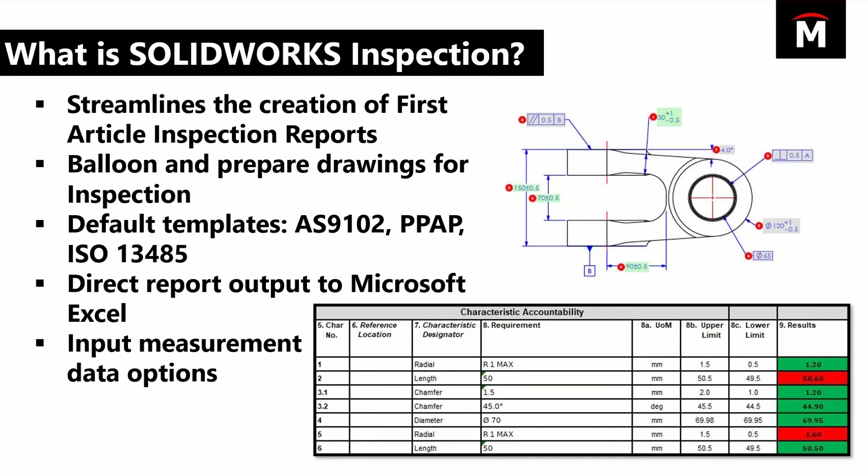Last but not least, we'll look at some input measurements for the data you get from, say, a CMM machine, like a Faro ARM or the PC DMIS tools. Take a look at that.

So you're thinking, okay, well that's great, I know what it is now, but why use it? Why is that important to me? Well right now, 85% of all first article inspection reports are performed manually. And you're like, wow, that's actually a lot - that is a pretty astounding number.

But if you think about it, all the human errors that could be involved, and the inconsistencies really is key here, because if you have 3 quality engineers producing some kind of first article inspection report, depending on which one you get it from, you're like, I don't know what I'm supposed to do with this. The technician will look at it and be like, what? So you want to have that consistency across the board, which will in turn improve the quality, and you won't have to worry about each quality engineer wasting their time creating their own individual reports when they could just be using a standard template across the board.

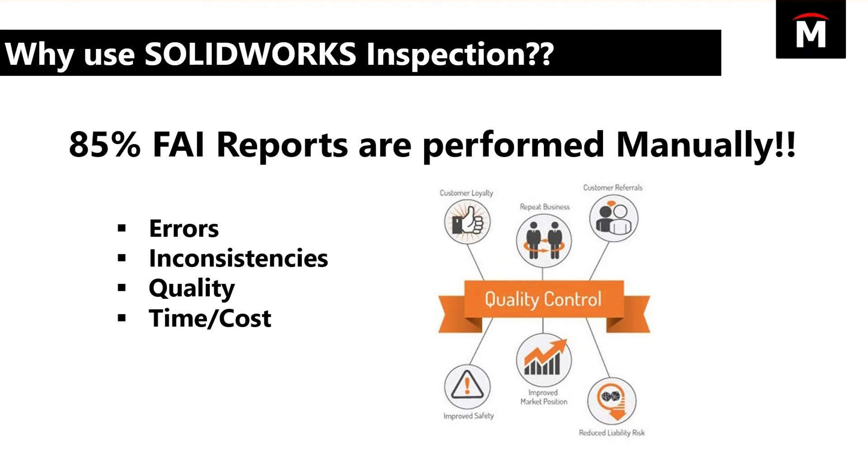And of course, in the end, that'll save you a lot of costs.

So SOLIDWORKS has 2 versions of inspection. It has the add-in, which works inside of SOLIDWORKS, so it's native - you open up native SOLIDWORKS drawing files or part files. And then you also have the standalone version. The standalone doesn't need to have SOLIDWORKS installed - it's just its own little button at the bottom of your screen, just another application on your machine.

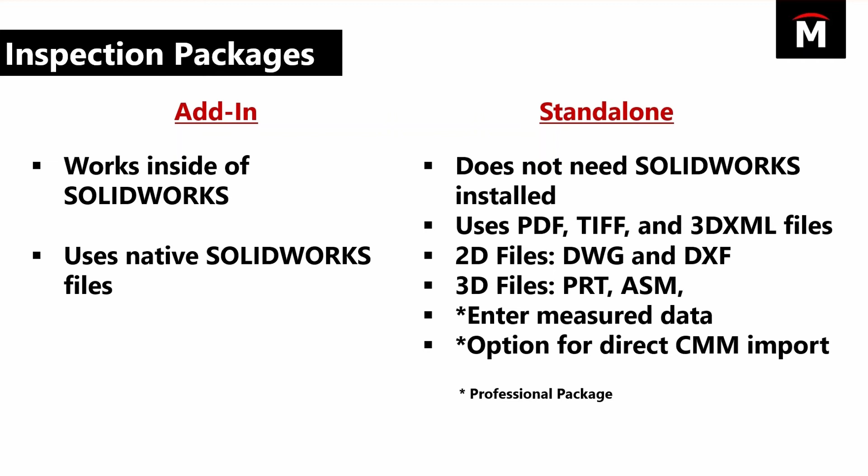And from that, you actually use PDFs, TIFFs, whatever kind of documents you can produce from other CAD programs, and it doesn't have to be SOLIDWORKS programs. As long as you can open it up and read the dimensions, you can use it inside the standalone version. And of course, when you jump up to the professional package, you can enter in your measured data, as well as directly import some of that CMM data. We'll take a look at that a little later on in the broadcast.

So we're going to break this down into 3 sections. First, we're going to start with our add-in, and the add-in, start with our project creation. We're going to add some balloons and then output some of that documentation. Let's take a look at it real quick.

All right, so everybody should see my SOLIDWORKS screen. I've just got a drawing up of this little knuckle on the screen itself, and I've already got my SOLIDWORKS inspection add-in added in. It's just like any one of those other add-ins, your markup, your evaluate, your annotations. So what we're going to do is we're going to start a new project with this.

I'm going to start a new project from scratch, so I can show you the ins and outs of where it begins and where it ends.

Now we want to go over here and pick out one of our templates. The point of having all these templates is because of all the standards out there, the ANSI and ISO standards. In the end, this is where you can build consistency across the board, so you don't have everybody making their own first article inspection reports randomly from one person to the next.

So now we have the creation of this inspection project. We just need to go through some general settings, import some of those, and then we can go on to the next step. The first thing you can do is easily go here and start typing in the name.

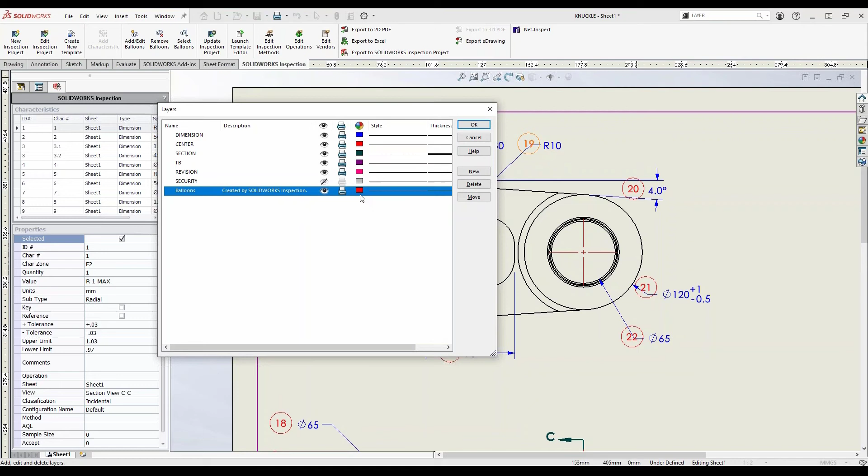As a matter of fact, you can go up here to the layer properties, and you can actually change the color of the balloons themselves, which is pretty nice if you wanted to change them. In this case, we're going to leave them the same, but it's just as easy as that if you wanted to make customizations to this.

The other thing here is when we click on this 70 plus or minus 0.5, it automatically recognizes that over here in our properties for our tolerances. So if it has a tolerance built into the dimension, it'll recognize it. But take for instance this 90 dimension down here, it just uses the tolerances set up in the project template. So it's very smart—it recognizes everything you see on the screen, and you're good to go.

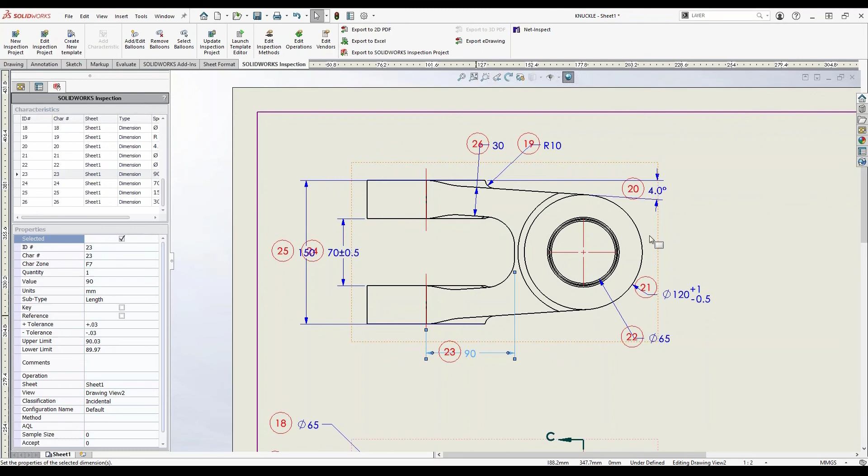All right, so I'll fit this to screen so we can see everything. Now what we need to do is create a report, right? Because everything's balloon, it's ready to go.

So check this out, we have different options available to us. We can export this to a 2D PDF, we can even export it to an e-drawing that became available in the last couple of years, but this guy right here, export to Excel, this is the one we want to see because this one's really powerful.

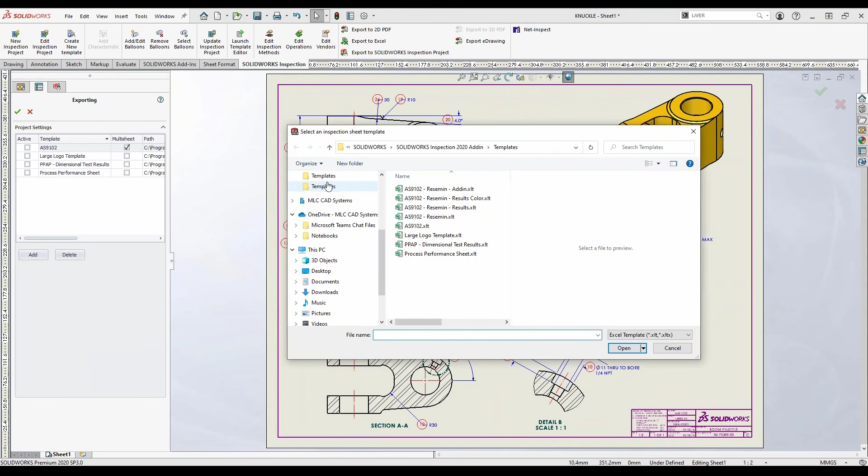I'm going to go in here and add the correct template. There we go. So I've built this template here so we can see some of the customizations you can do inside of Excel itself. Let's go ahead and hit the green check here, and I'm going to override this guy.

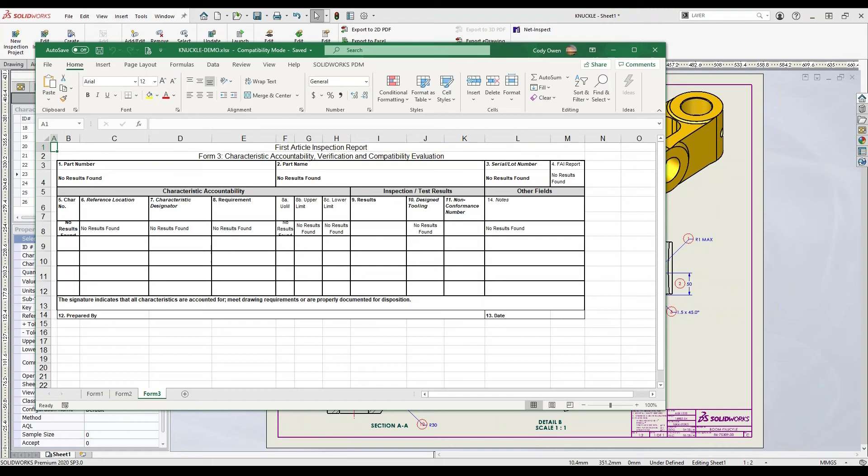There we go. So we're sitting back relaxed, let SOLIDWORKS do all the work for us, and now we can go down here and take a look at our inspection report. As you can see, when we go through, it'll fill out the form for us. It'll put in, if we had a bill of materials, which I'll show you in a minute, it'll show us the bill of materials down here on the screen.

As a matter of fact, I'll show you a little bit more about how you can color code some of these things a little later inside the standalone version itself.

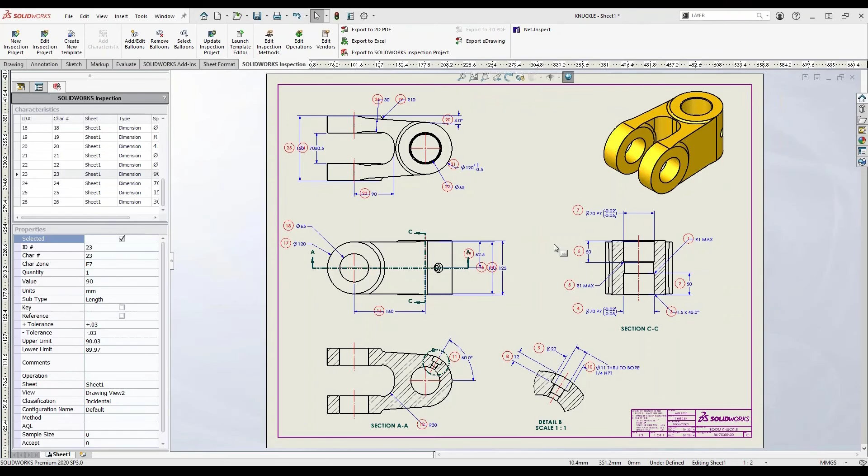So you've got your document made up and you're ready to go, right? And that's pretty much all there is to having the add-in inside of SOLIDWORKS. It recognizes all of those dimensions automatically, and it's a very familiar environment. If the mechanical engineers are having to do this work, they're going to be able to pick it up and learn it very quickly and produce some very consistent reports.

All right, so talked a little bit about the add-in. The next thing we want to look at is the standalone version. The standalone version itself, you go through the same motions where you create a project. This time, since we're going to be working with a PDF, we have to use our optical character recognition to define some of those characters for our file properties, and then also use our Smart Extract tool to pick up some of those dimensions, notes, and so forth.

Let's take a look at that. So I've got my SOLIDWORKS Inspection standalone already open for me. Now I'm going to go ahead and start a new project.

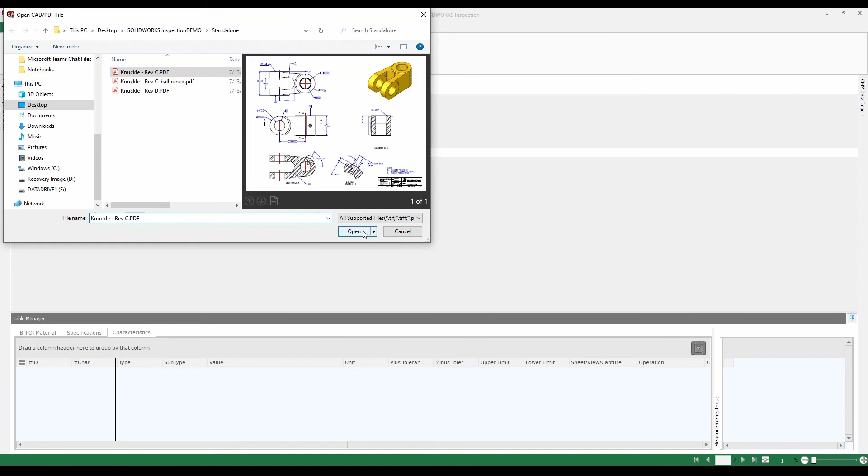When I start a new project, I'm just going to use this template here. Once again, these templates are just standard templates, and you can easily go through and customize these things as you want. So I'm going to use my RevC. In a little bit, I'm going to show you how we can go through and create a revision update with our RevD, and how easy that is to do.

All right, so what we have here is pretty much that same drawing, it's just got a couple more items on it. I'm going to go ahead and look at our properties. Fit this to screen so you can see it all. All right, so we can see our whole drawing here.

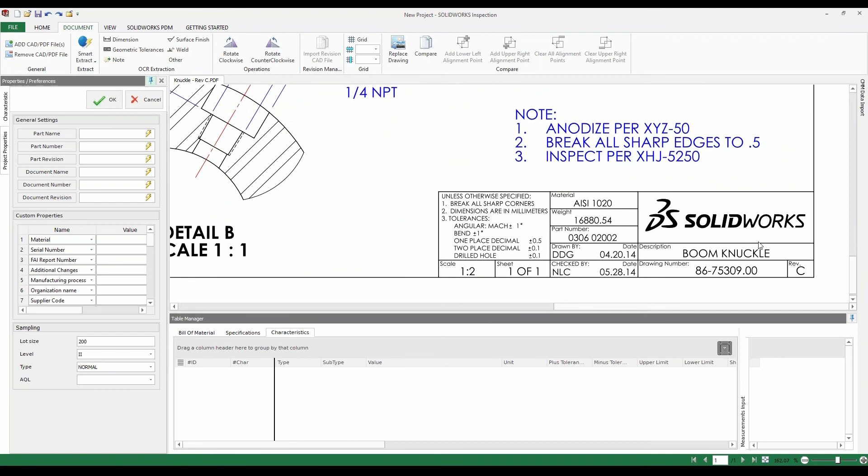Now what we want to do is go in here and either type the part name in, the part number, revision, kind of do all that little tedious work that has to be done. But see those little lightning bolts next to it? Well, that's that optical character recognition. And we can actually pick up those characters by clicking on the little lightning bolt, going over here and drawing a box around the name itself, and it inputs it over here. So that's pretty awesome, right?

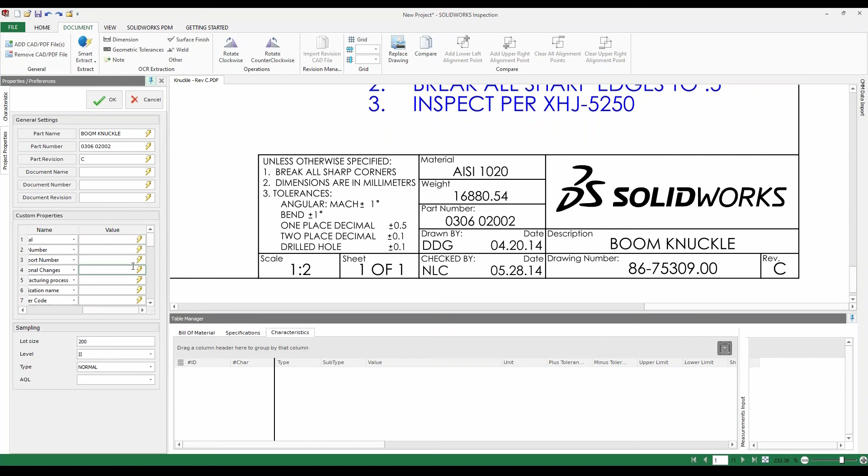If we want to, we can go ahead and add a couple more in there so we can pick up everything. So it doesn't have those file properties built into it like the SOLIDWORKS drawing did, but it's very easy just to draw a box around some text and make sure it looks good, and that's good to go. So you can do that with the general settings themselves and also your custom properties. You can do the same thing for the materials, for the manufacturing process, and so on.

All right, I'll click OK there. I'll fit this back to screen, and we're going to focus in on the upper portion of this document. Okay, so now we've shown you how we can pull those file properties in. Now let's take a look at some of these dimensions.

I'm going to go up here to my Smart Extract, and I'll just draw a box around our 150 plus or minus a half. I can verify all the information over here in this characteristic by making sure the nominal value is 150 and our upper and lower limits are plus or minus a half. We can simply draw a box around each one of these, and it picks it up automatically for us.

Let's check out this guy here. So once you go through and make so many changes, the inspection tool says, hey, do you want to save this? You can adjust that. I'm just going to say no for the time being, but it's nice to have that reminder.

I went through and added the 65 diameter, and it picked up the diameter for us there. So it has that recognition built in, even for other dimension types like the angle or degree. It's literally just a matter of drawing a box around something to pull in those dimensions.

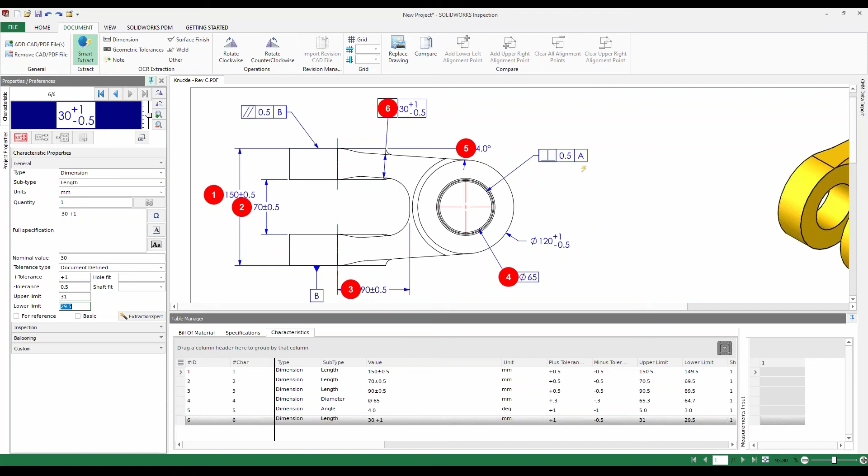Even if you have to go through and make little changes like that, it's really not too hard to do. We'll go ahead and grab a couple more dimensions down here to get these, and we'll be on our way.

So it's not a lot to it, we're able to go through and pick a bunch of stuff. But what about notes? What if we wanted to recognize some notes as well?

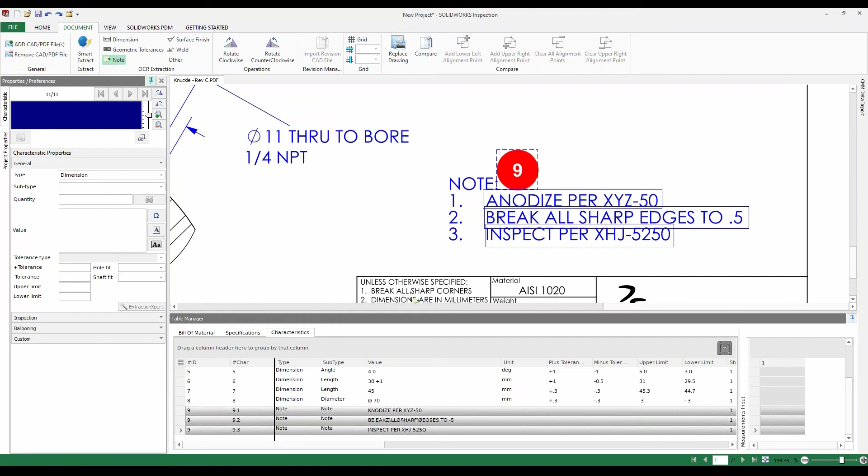I'll zoom in over here, go to our notes, and start drawing boxes around each one of these. You may be thinking, oh man, I don't want one individual characteristic for each of those notes. Well, that's okay, because down here in our characteristics window, we can actually group those together to be under one shared balloon, and then move the balloon over so it's not covering it. It's really easy to make those little modifications for any notes or dimensions.

In some standards, they actually require you to include a bill of materials. So I'm going to show you how we can import a bill of materials from Excel. Down here in our table manager, I'll click on the bill of materials tab, then click on this import button, and go to a bill of materials.

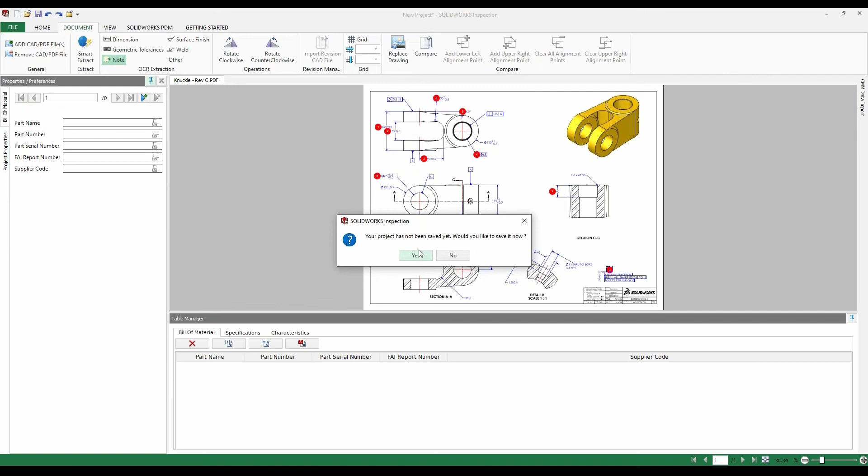I'm going to open this up. What SOLIDWORKS is going to do is recognize all those bill of materials inside of this window, and put them all in - part name, part number. Everything's laid out according to the standards that are set out there. You may not always have to do this, but it's really nice to know that's a capability you have with this tool.

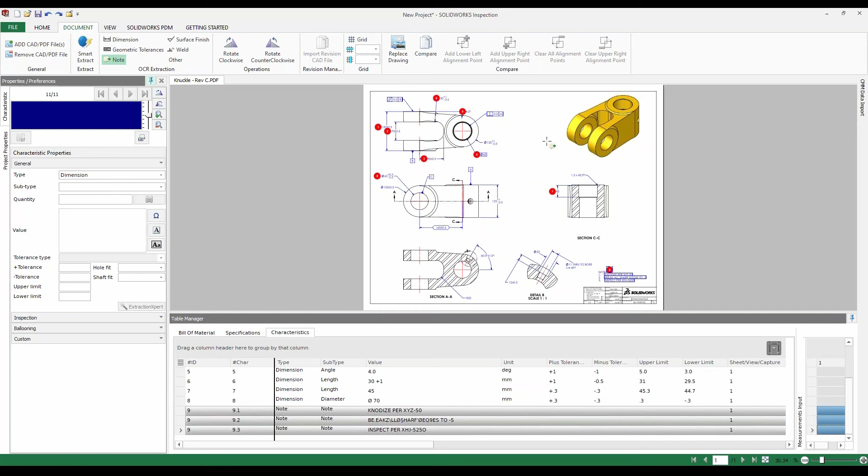And take, for instance, if you had to add more sheets to the document - we're just working with one PDF right now. If we wanted to add more sheets, we could go up here to the top of the screen and add more PDFs, so that way we're not working with just one, we could be working with 20.

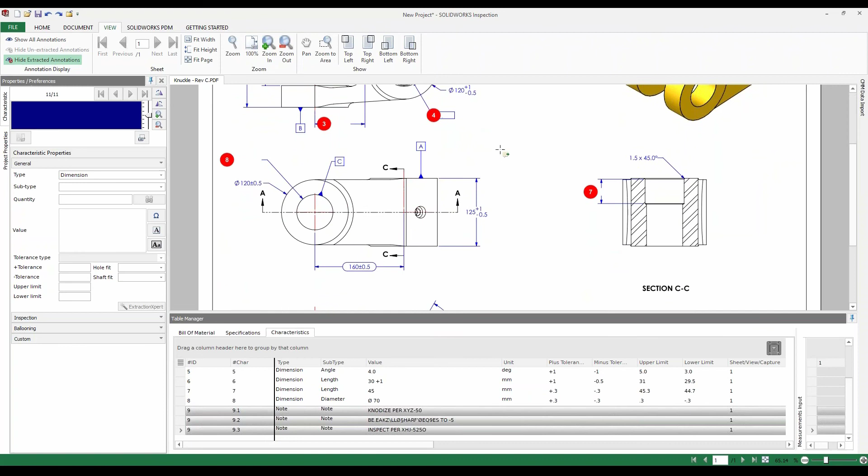And speaking of going through all 20 of those sheets, you're like, okay, I've got everything noted, I've got everything set up for the first article inspection report. And you're like, I wonder if I missed anything. Well, check this out, there's an option here that'll hide the extracted annotations. So if you take a look, everything I've already marked for inspection is hidden, and everything else is still visible. You can see these ones that I missed here. So little tools like that, just to show and hide things, really help you become more efficient and get these documents out sooner than later.

All right, I'm going to go back so we can see everything. Now we want to go in here and start our report. I'm not going to finish all this, going through and boxing all these dimensions in, I think you get the gist of that. I want to go up here to our home button and export this out to an Excel document. As you can see, I've got all these different templates set up. I'm going to choose this one here and export it. And since it's for our Rev C, we'll take a look at that real quick.

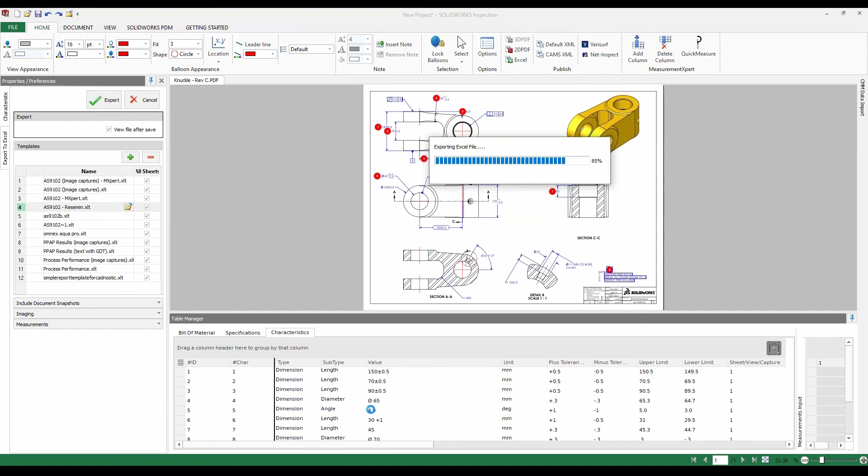All right, looks like it's coming up down here at the bottom of the screen. Fantastic. So in this form, you can see all of the dimensions in here are similar to what we saw a little while ago. On the first page, this is where it includes all of those bills of materials that we imported in. So that's nice that information's there.

But now check this out. So if we wanted to go in and start typing in our report, what we're going to have is we're going to see our pass/fail, very, very easily seen. Everything's either a pass in green or failed in red. So you can have that in both the standalone version set up in the Excel document as well as the add-in. And all of these Excel documents are customizable, and this will help users be able to identify quickly those failing characteristics.

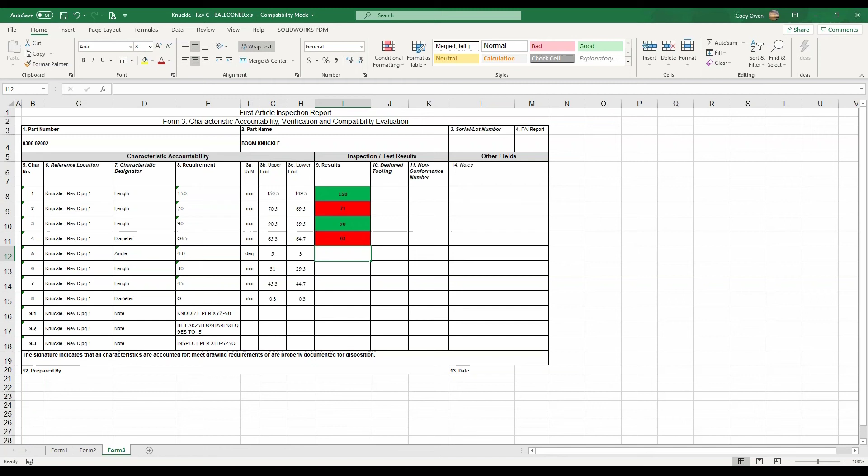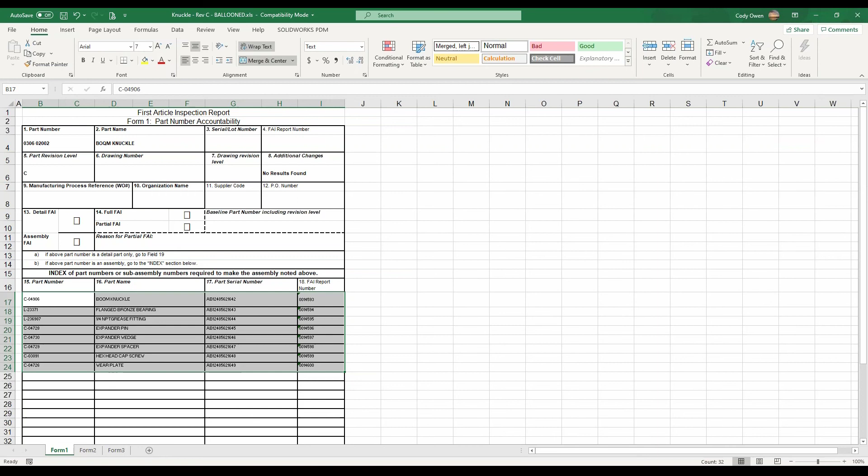So you're like, well, that's pretty awesome to be able to see which ones failed, which ones passed, and to be able to have the bill of materials. So the next thing probably in the back of your mind is, well, what about the revision changes? Like, oh man, those dreaded revision changes. I'm gonna have to go back and redo the entire document all over again.

No. Not with SolidWorks Inspection. You don't have to redo the whole thing. Once you've gone in and placed your inspection tags on each one of these dimensions, with the same document, just a new revision, we can go to our compare tool.

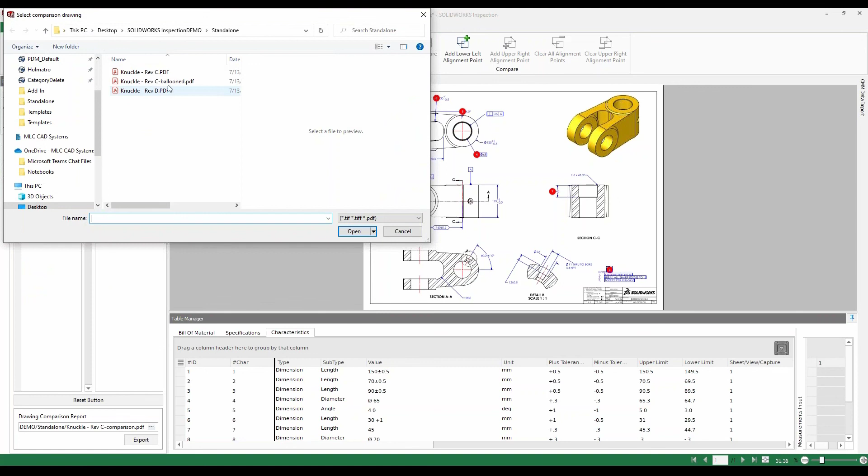So I'm going to click on compare, and I'm going to compare it to our Rev D. And what this does is overlay the new drawing in green over the original drawing, with everything marked in red. I'm going to zoom in here so you can see it a little bit better. All right, now you can see some of these items up here in the top, that same red and green color overlaid. That means all those are good, I don't have to worry about those.

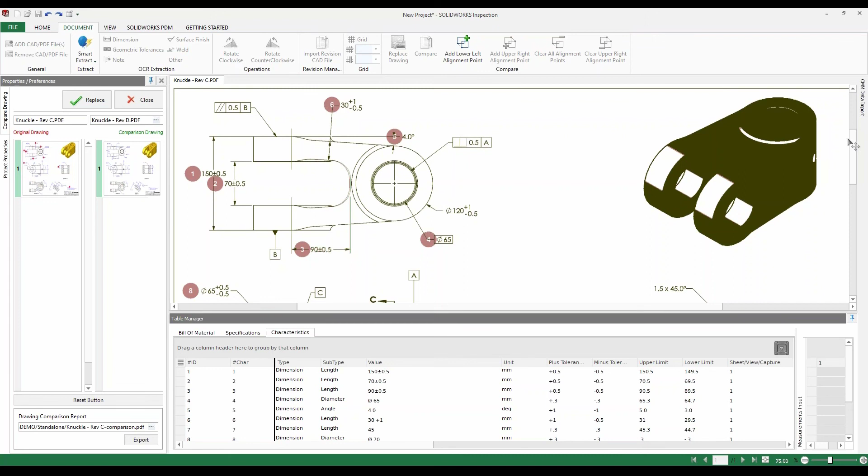So check this out, when I scroll down here, I'm going to see that, oh man, I've got this guy in red that was on my previous revision. That's no longer there, and it has been replaced with these guys over here in green. So you're like, oh, go over, look at everything. You're like, that's it, that's all we have to worry about. Okay then, so that's all we're going to worry about.

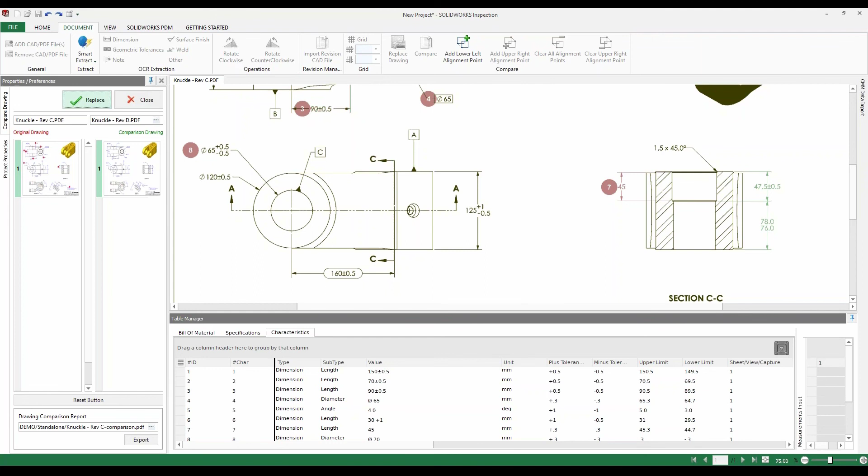Hit the replace button, and now we can go down here and delete the old mark. As a matter of fact, it'll renumber it if you want it to. I'll click yes here to renumber it. And now I can easily go up here, grab my dimension tool, and start adding the dimensions to the ones that are newly added to the revision.

So you don't have to go through and recreate every single one of those. You just have to mark the ones that have been updated. Think about the time that you can save just in that tool by itself, that you don't have to go through and redo every single thing there on the screen. That's just remarkable. I guarantee you, a lot of you are like, yeah, that's pretty amazing. The benefits of that are just outstanding.

We'll jump back over to our tool here, to our PowerPoint, and you're going to see how simple it was to extract that data, and then of course attaching those BOMs from Excel. And last but not least, the big kicker of it is those revision changes are just made to be so simple, and they're no longer time consuming as they probably have been in the past.

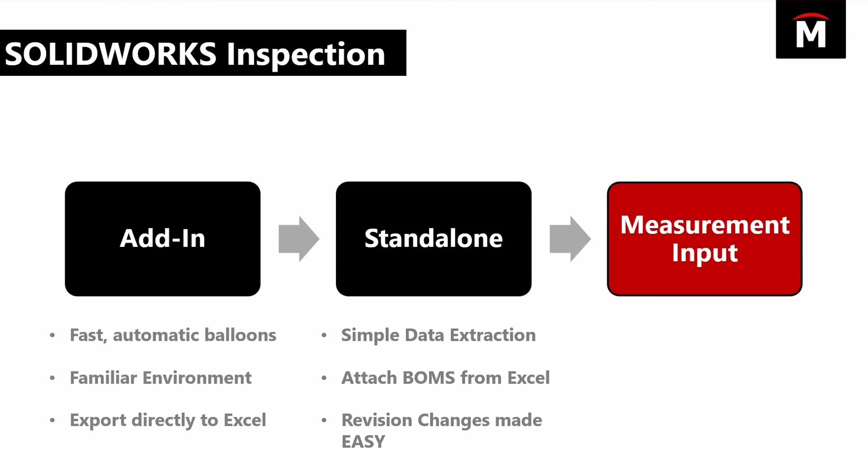So far, we went through and we looked at the add-in, we looked at the standalone. Let's take a look at more of the professional version, the one that you can actually have input data inside the program itself, or even import it from a CMM input. So let's take a look at that.

Jump back over to my standalone version here. All right, some of you may not have noticed that there was this little guy down here in the bottom window, and it's associated with all of the dimensions that we've typed in there so far. So take, for instance, if I had this open and I just wanted to manually import some of these dimensions, I can go in here and I can start typing them in just as you see.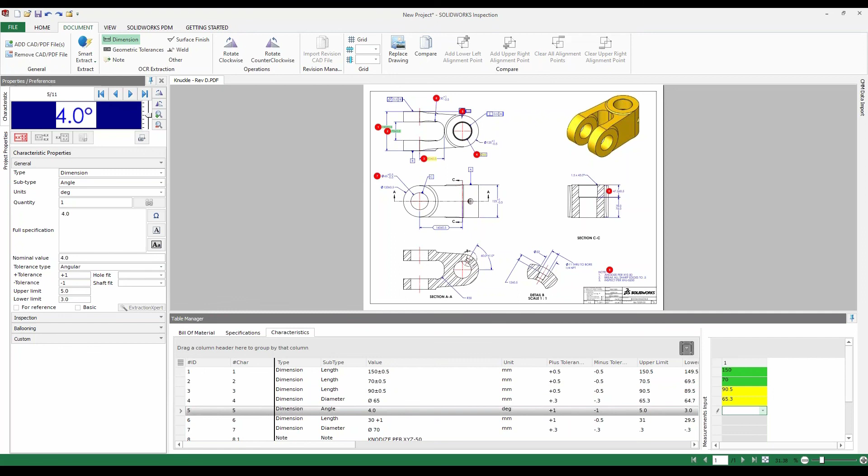You're going to notice that there's going to be a difference between some of them that have that green, and then others that have yellow and then also red. Those let you know very easily, in just a quick visual look at it. You can see that, hey, that's passed, or that's failed, or that's just on the cusp of failing or passing. It's that marginal zone. So you can go through, and as a matter of fact, if you had 3 or 4 lots, you can add as many lots here as you want.

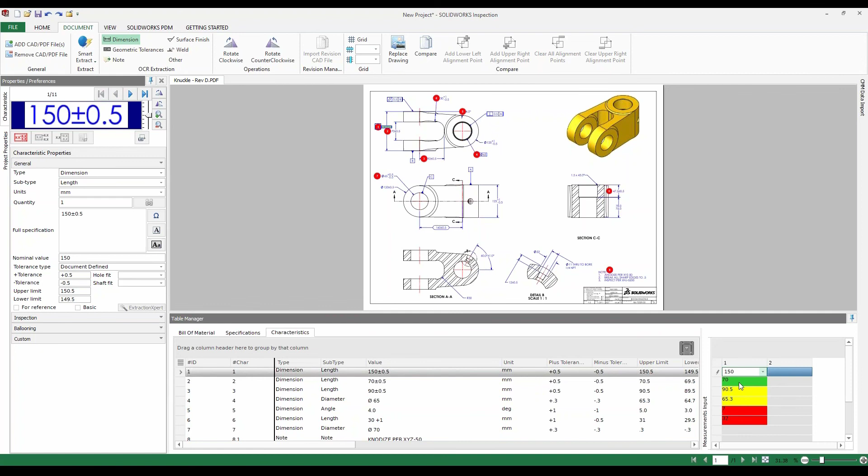And the really, really nice thing about this is if we click on any of these dimensions, let me zoom in up here at the top of the page. It's actually going to show the ones that are marked in green, the ones that are marked in yellow. You can see which dimensions passed and which ones actually failed. That's pretty remarkable. That's a really nice capability of this program, to be able to quickly see, hey, that's a problem, or hey, we can leave it alone.

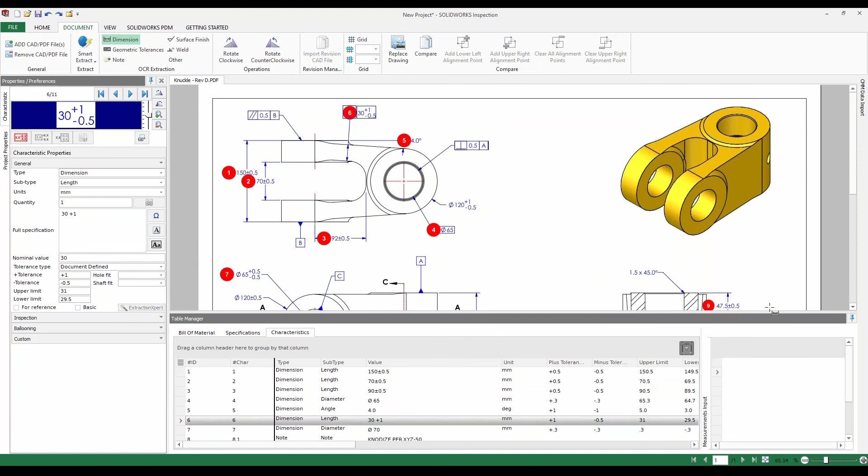But you're like, well, what about not doing that? What about importing these dimensions from your CMM data? We can do that as well. So check this out. Go ahead and fit this back to screen. I'm going to go up here and pin this so that way I can grab it.

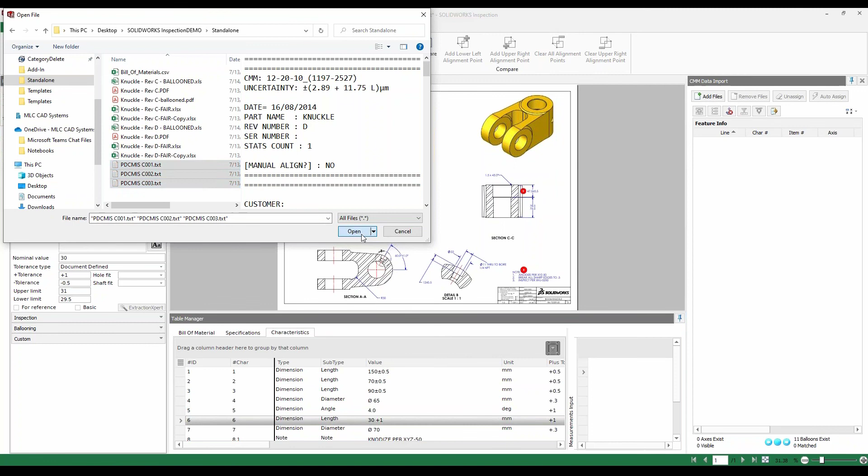And all we have to do is just add our files to it. I've already went in here and collected the data. It's going to be these 3 text files. So I'm not just loading one text file, I'm loading 3 different text files from, say, 3 different lots or 3 different samples. I can go ahead and open them up, and what you're going to see is all of the data is going to be input from each one of these. So you see the file sets, file 1, 2, and 3, and you have all of your dimensions that were added in there. So inside of this tool, you're like, well, that's kind of nice.

Let's see what this can do now. Well, I like to use this auto assign feature. It was added not too long ago. You can actually go through and say, add the plus or minus nominal dimensions. And yeah, if we got anything else in there, we'll override it. But as you can see down here in our measurements input, you can see all the things that have passed and all the things that have failed.

So if I just went through, did my due diligence, and had put a dimension around every one of these and made sure everything was right, we'd have a lot more data down here at the bottom of the screen. But since I didn't do as many, you can kind of see the end results and get a good visual of, wow, that's really nice to see.

And as a matter of fact, if you have any up here that doesn't have a characteristic affiliated with it, you can click in here and choose that particular characteristic from the screen itself. So I like to use the auto assign. It'll go through and do most of the hard work for me, and then it's just a matter of filling in the blanks after that.

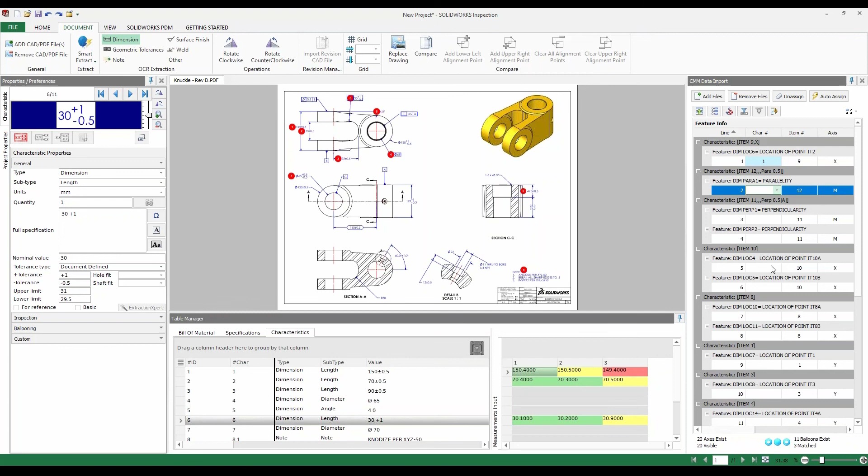And that just takes very little time to do in comparison to having the inputs come from that CMM data and having to look at every one of those manually, say from an Excel document, comparing to what you have there on the screen. So huge time saver here, and you can easily see which ones passed and which ones failed.

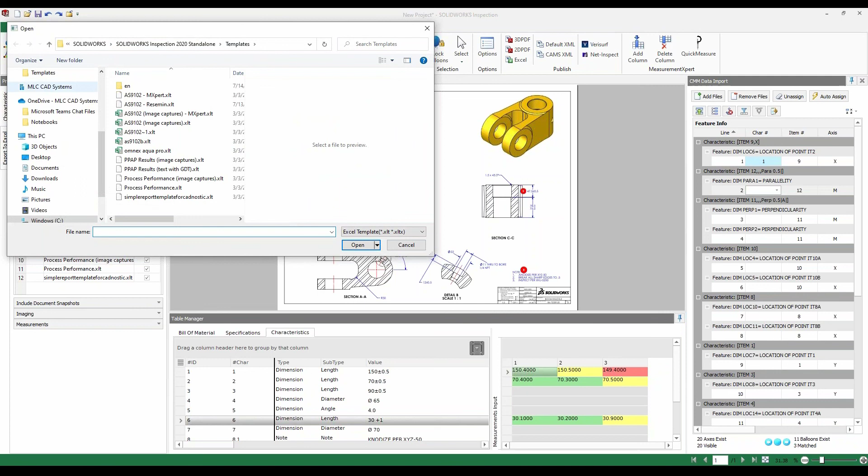As a matter of fact, you can actually take this into a report, for instance. Some of you may have government contracts, or some kind of prototype that you're testing, and you want to see how it's stacked up over the last several examples you've worked on. So what I want to do here is add a template for the results.

Export this out, and we'll go ahead and give it the Rev D. So that way we can take a look at our report from our CMM data.

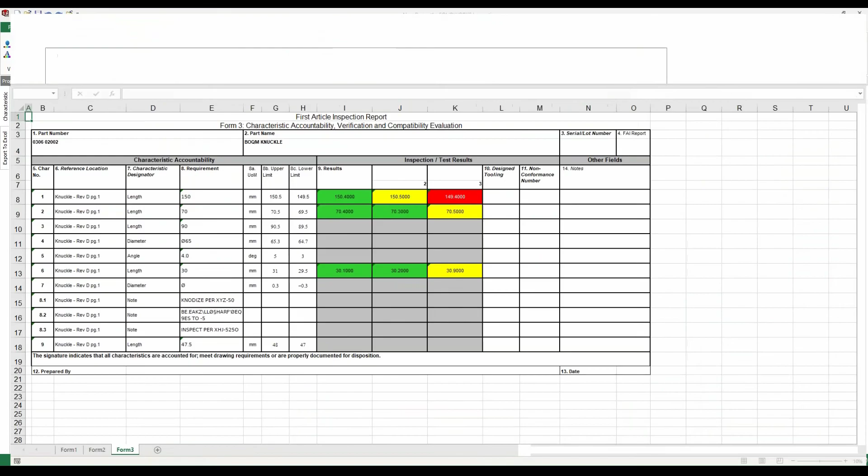So check that out. As I mentioned, if I'd have done my due diligence and added a few more things in there, you wouldn't see so much gray stuff, but hey, you kind of get the picture of what's going on here.

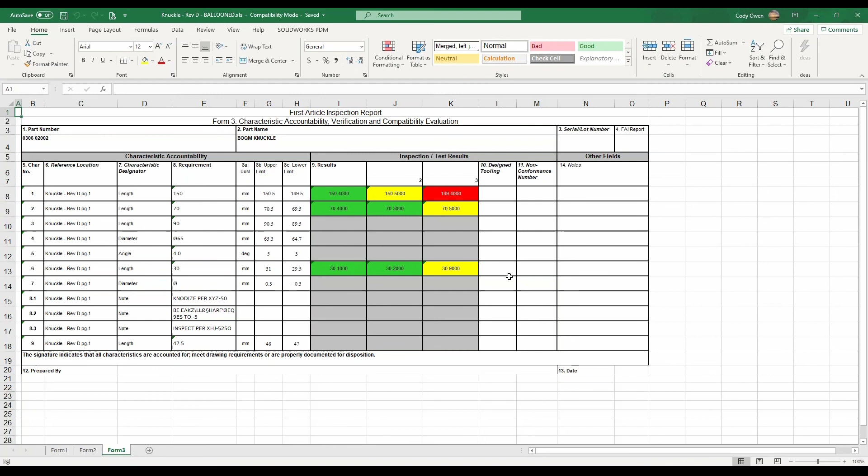So if you had an audit that you needed to go back on, like some data from 6 months ago, you could easily just pull up this file as soon as you found it, and actually say, look, this is the data from it. This is what we based this part off of. Say if it was a prototype, or if something had failed and had to be audited. In other words, you would have that data there to be able to see it and verify it.

All right, so that's pretty remarkable about what you're able to do just with that measurement input, whether you input them manually with the standalone package, or you step up to the professional package and include that CMM data.

And of course, having all these documents, all these Excel documents, they're great for having just in case something in the future comes up and you have to fall back on them.

So today I went through and showed everybody kind of the ins and outs of the SOLIDWORKS add-in, the standalone package, the professional package, and in a nutshell, this tool is really simple to use.

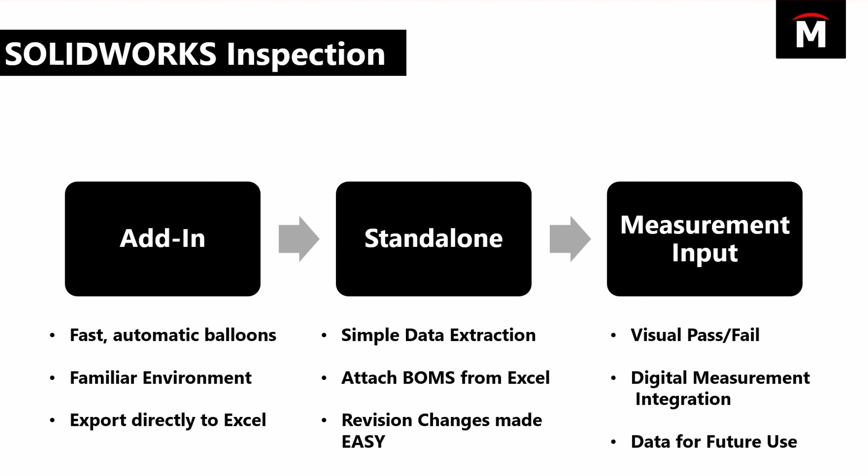I believe just by showing you this demo, some of you probably can figure out exactly how to do that, just using the standard documents that you have inside of SOLIDWORKS, the standard templates. But we can definitely help you out if you want any more customization to it.

And also, with this inspection tool itself, consistent documentation is key. That's what a lot of companies, as a matter of fact, that I used to work for when I was doing quality checks myself. There were so many different ways it was done. It was just a headache, and it really was.

And so having that consistency across the board is key, and saving time just in itself, so that way you're not having to jump back and forth between documents trying to figure out what was going on.

And at the end of the day, you get to definitely increase the accuracy of the data that's being produced. And if you ever have to reference those in the future, you can always fall back on them and have all that documentation ready to go in case you have to do that.